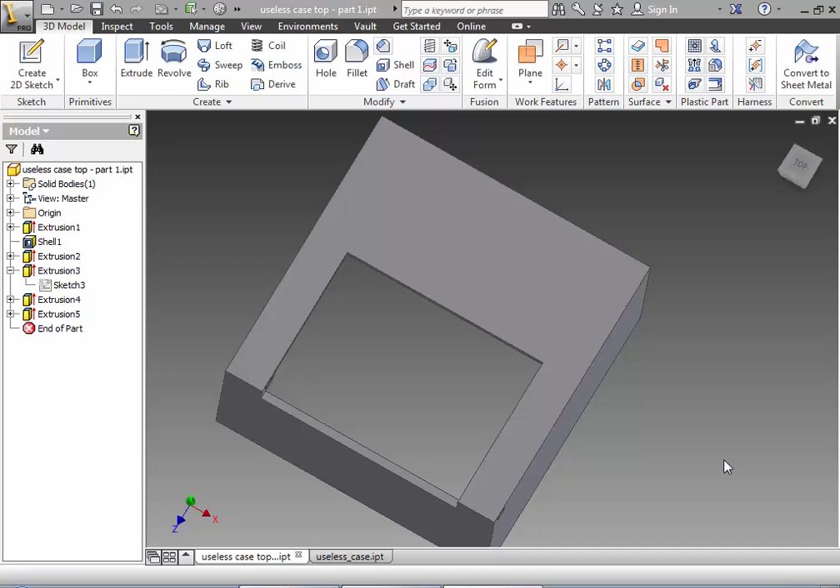This is part 4 of the tutorial on making the useless box, the top part. In this tutorial we're going to add the hole for the switch.

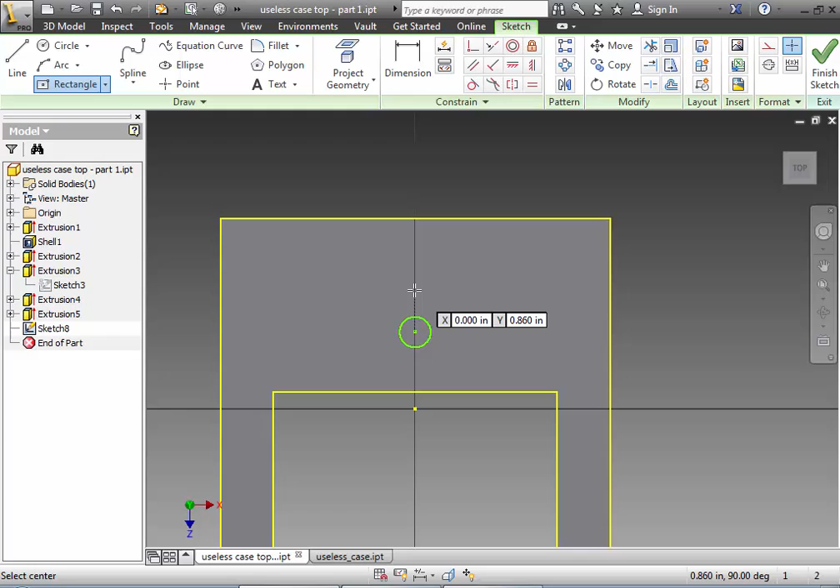We'll start with selecting the top, create a 2D sketch, and zoom in here a tiny bit. A switch consists of a circle, which we'll put in dead center for right now, and it consists of a rectangle. The little rectangle is meant to hold a tab on the switch in place so that it doesn't spin in the hole.

So there's my two basic parts, and as usual we dimension them. This circle radius is going to be 0.23. This rectangle, when I zoom into here, the top part here is going to be 0.12, and the sides are going to be 0.06. You can see I came off center, so I'm just going to grab this right now.

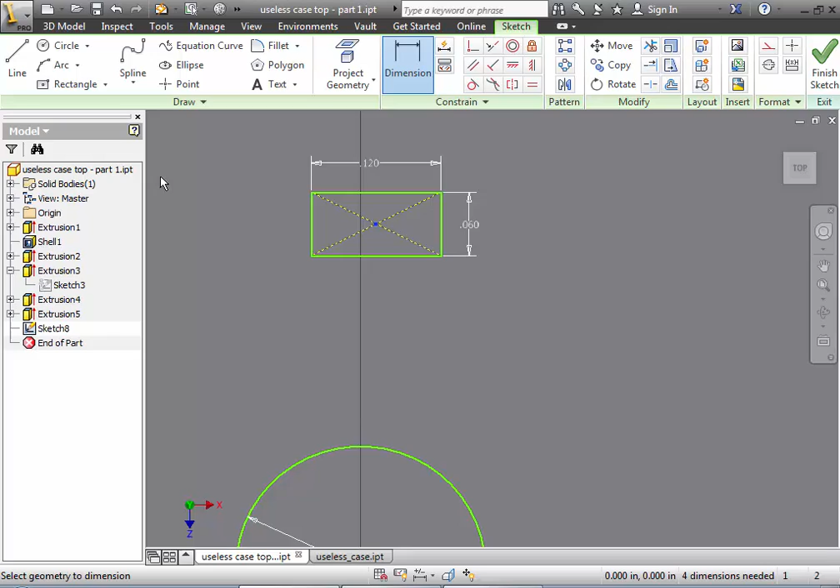We're just going to hit escape. What I'm going to do is go to move, select this whole thing, and go to move base point. We're going to select that base point there, which is the center, and snap it back onto that line. Okay, so it's back in place.

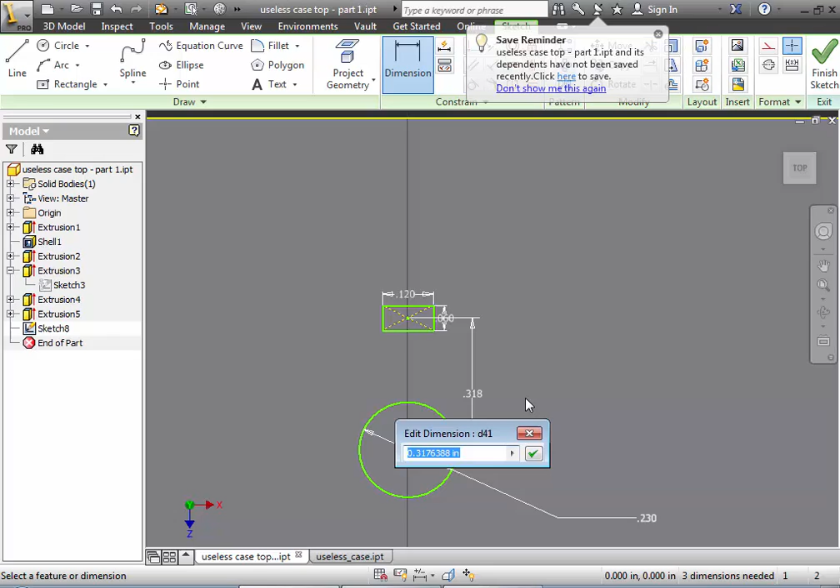Now that we got those in place, we'll continue on with our measurements. Our next measurement is going to be the distance between the two. I'm going to go dimension from right here to the center. That distance is 0.225, so it puts those close together.

The final dimension we need is the distance from one of the edges. So I'm going to go from the top edge, from this edge here to the center of the circle, and from over here this one is going to be 0.75. So that puts our circle and our little tiny rectangle roughly in the right spot.

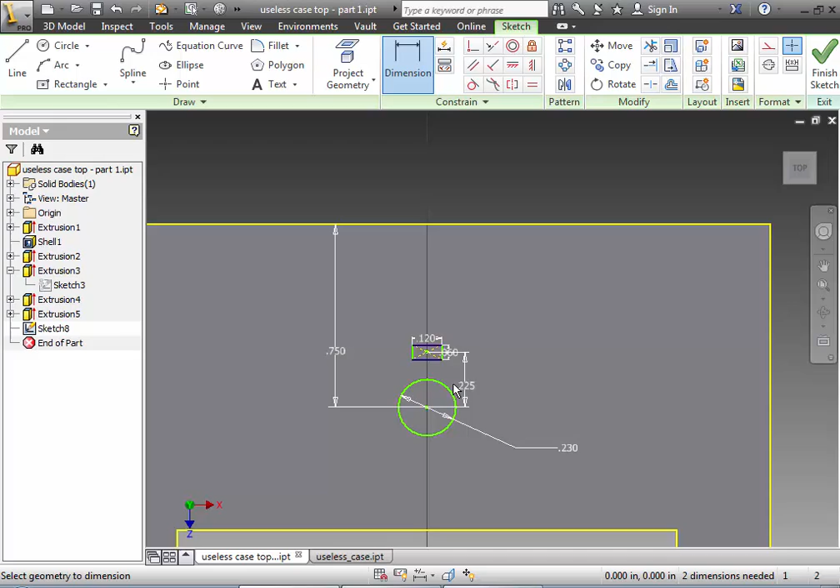Later on, you'll have to adjust it from one side to the other depending on where your servo finger lines up, and we'll talk about that later. So that's basically where it sits. We hit finish, and the rest is pretty self-explanatory by now.

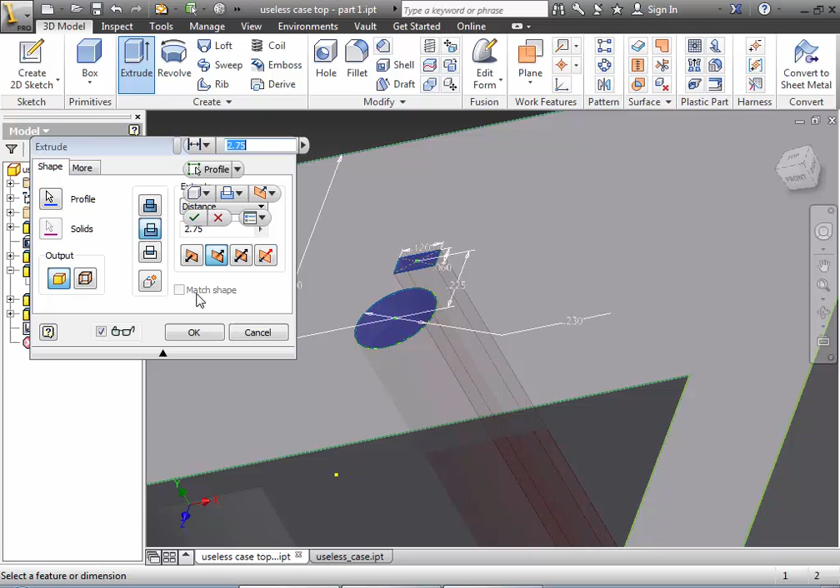You click on extrude. I'm going to select the circle and select that little rectangle, and just change it to cut, moving this a tiny bit. We're going to go to next surface, to next, which means it's just really short, and click OK, and there we have the spot where our switch will eventually go into.

Again, later on in another tutorial, we're going to show you how to move it to line up with the actual servo motor.

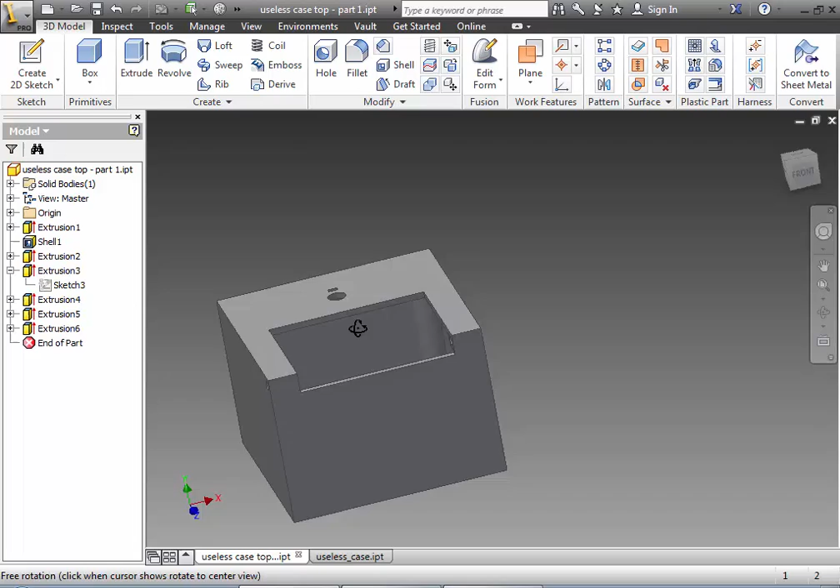Also, to finish off here, I'm just going to flip this upside down, and we're going to add a little tiny tab to the bottom of this. I'm going to go to complete bottom so you can see it. What you need is a little tiny tab that hangs over the edge here to take the lid. So we're just going to create a little box on this surface.

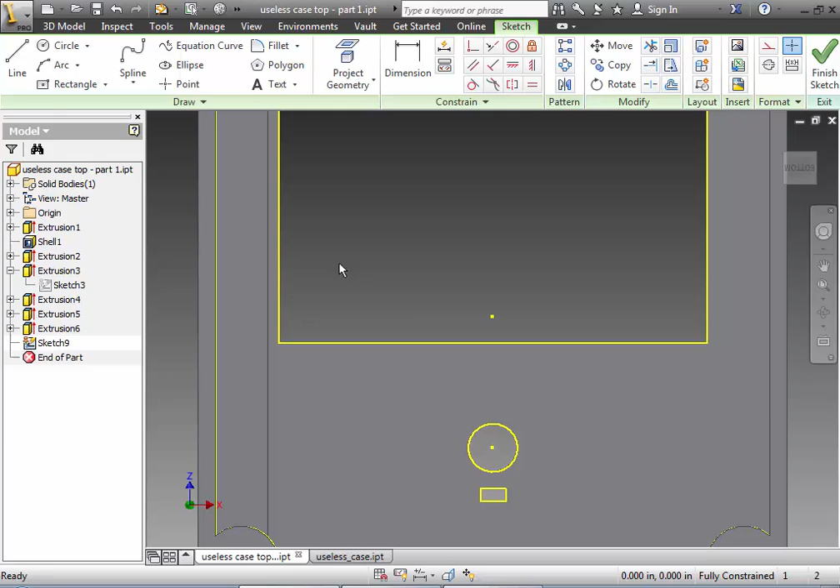That box, it really can be any size. Sorry, not a box, I apologize, I can escape to get out of this. Create a 2D sketch on that surface, and it just has to hang over a little bit so that the lid holds on it.

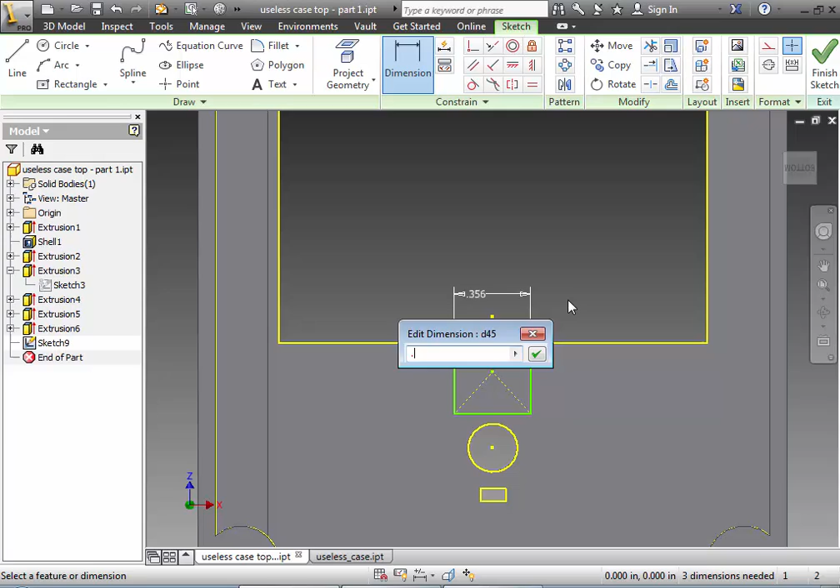So I'm just going to create a rectangle. Again, we're going to find dead center here, and I'm just going to create it like this. We'll simply add a little dimension to it. Let's say this is going to be, I don't know, 0.4. It doesn't really matter. And this way, we'll add this to be 0.3 maybe.

Then finally, a little dimension just to hold it off the edge. So go like this, and that's going to be, I don't know, 0.2. It doesn't really matter. Oops, wrong way, I went the wrong way here. Let me take this. What happens if you go negative 0.2? Nope, doesn't like that one.

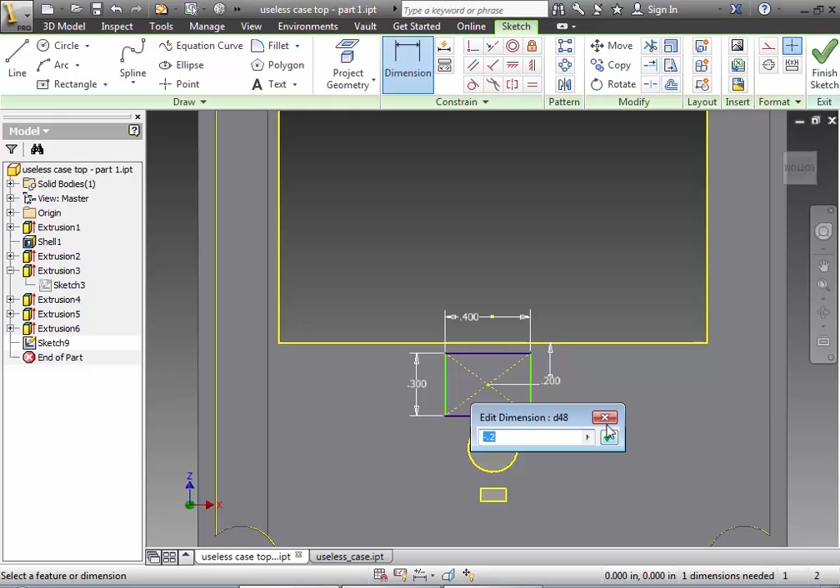So we're just going to get out of this dimension, hit escape, delete this dimension. What we'll do is take from this one to there, click dimensions, try that once more, click from there to there. I'm going to change that to 0.2. There you go, kind of hangs over the edge, so that gives you just a little bit of a lip.

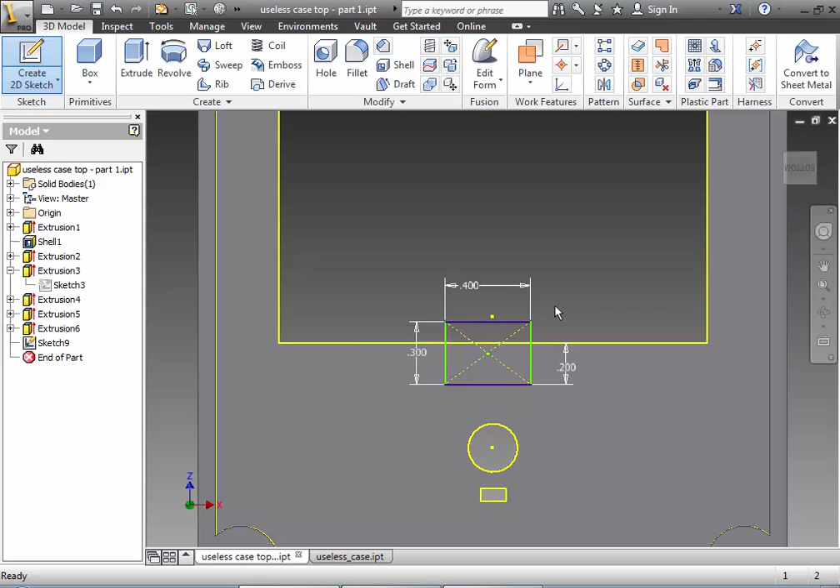Click on finish, and then we'll just extrude it. All we're going to do is extrude this little piece here. Let's click it, make sure I grab it right. It doesn't have to be very thick, so we're going to leave it at maybe 0.1 of an inch.

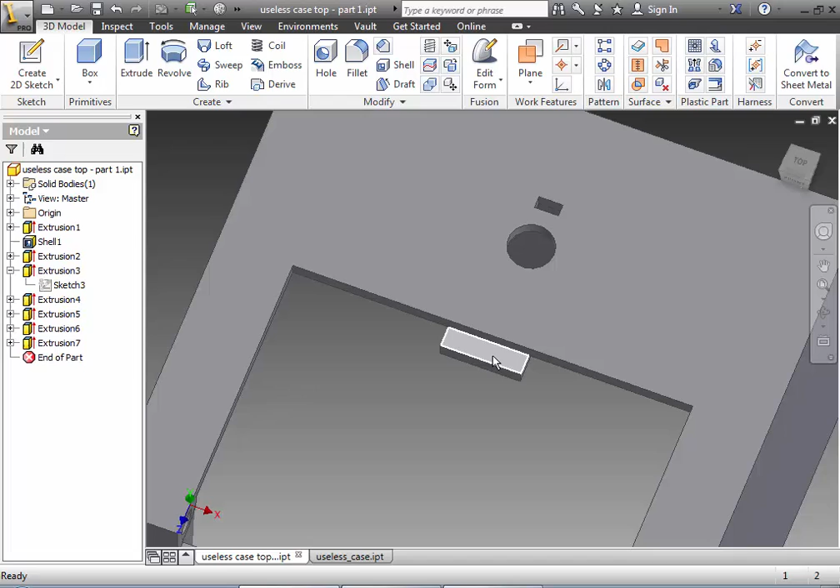And then there we go. So now what we have is a little tiny tab sticking out in the center, right? So when the lid comes down, it actually clicks on that lid. And that will end tutorial 4.